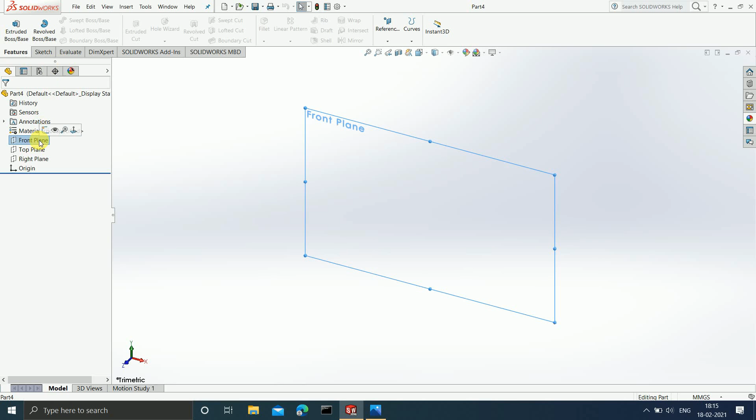First of all, click on File, click New, select Part, and then click OK. As we all know, whenever you want to make use of the Revolved Boss base feature, we first have to have a sketch, and if you want to draw a sketch, the first important thing is that you select a plane. So I'm going to select the front plane, then go to sketch and click on sketch.

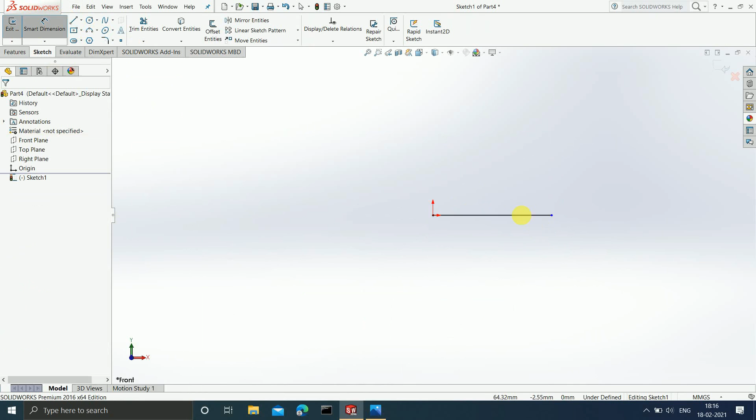Let's start with the sketch. Now we will start with the bottom part first. First of all, let us draw this horizontal line of 5 mm. This has to be 5 mm. Escape, smart dimensions, and give it as 5. Done. Now after this, let us draw this slanting line which is at an angle of 150 degrees.

Escape. Let's give the smart dimensions as 150 degrees. Giving the dimensions here is very important, and make sure that your figure is completely defined in this case.

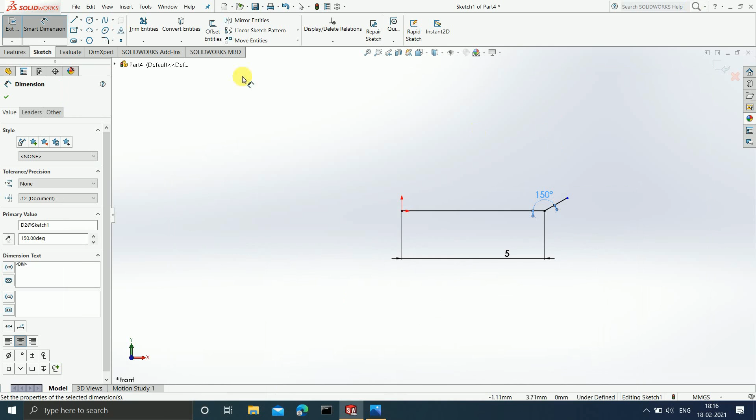Now after this, again there is a slanting line present here. Let me first draw that. Guys, you have to practice the sketches. Press escape. Make sure this point is exactly vertical to this, so I'm going to select these two points and add a vertical relation between them, then click OK.

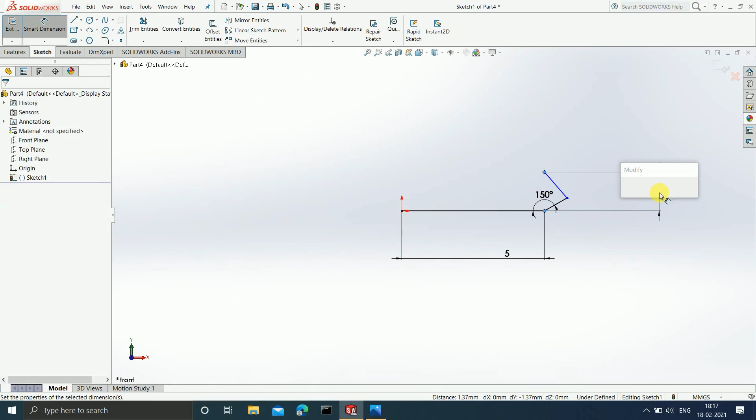Now after this, you can see that the distance from this point up till this point is 1.5. So let's give the measurement here as 1.5. Done.

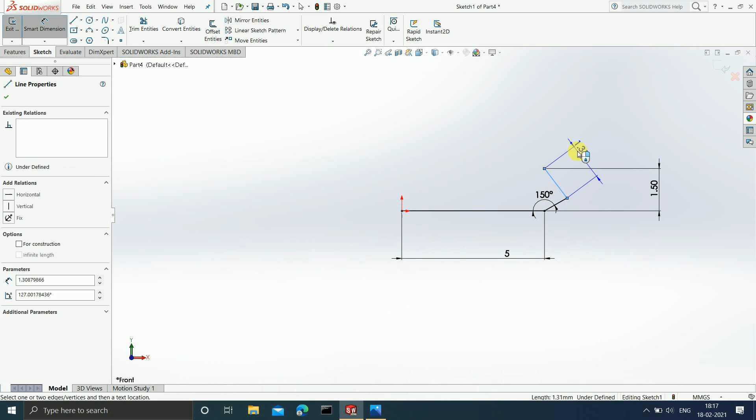Now the next thing you can see is that the measurement of this slanting line is 1.38, so let's give the smart dimensions to it as well. It has to be 1.38. Done. So this much part is done.

Now after this, there is a fillet. Before that, we will do the fillet which is present here, and the radius of the fillet is 0.2. Let's click on fillet, select this line, select this, first enter 0.2 here, then select this and select this. See, now can you see the fillet has appeared? Once this is done, click OK.

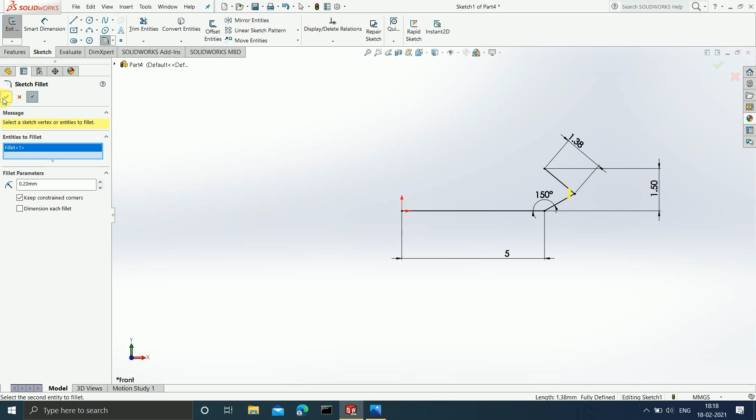Just move these dimensions aside so that there is no mess present here.

Now after this, we are going to make this curve which is present here. So for that, again we have to make two slanting lines intersecting at a point. Okay, so I will select this, I will add this. From this point I will make a slanting line. We are done with these slanting lines. Now it is time for us to give the dimensions to it.

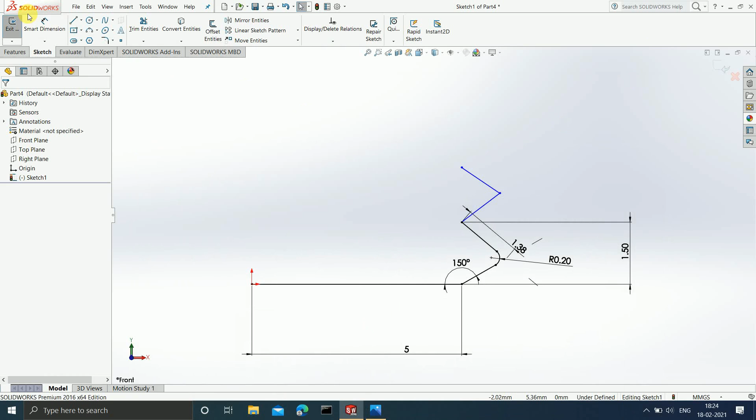Okay, so as you can see, the dimension from this particular point till here is 0.6, so let's set the dimension as 0.6. From this point till here, it has to be 0.6. Enter. Now after this, from this particular point till here it has to be 2. Can you see it is 2 here? So let's add a 2. Enter.

And see, the dimension from this end of the slant line till this vertical line is 3.5. So let's do the dimensions for that as well. Okay, see, earlier it is 5, let's make it 3.5. Enter. Done. Now after this is done, can you see that there is a curve present here? This curve is formed with the help of the fillet, and the radius of the fillet is 0.6 as mentioned here.

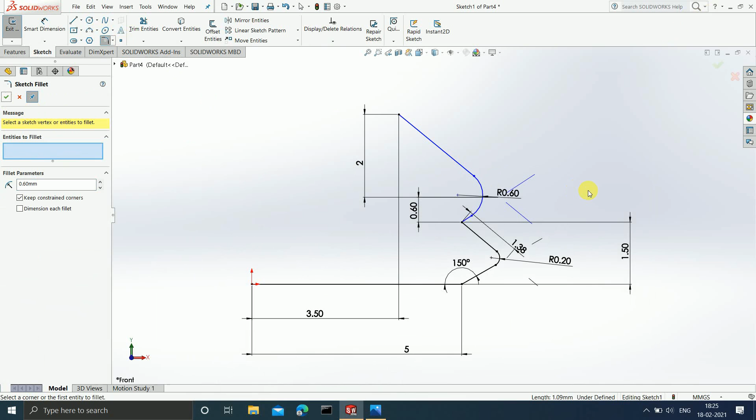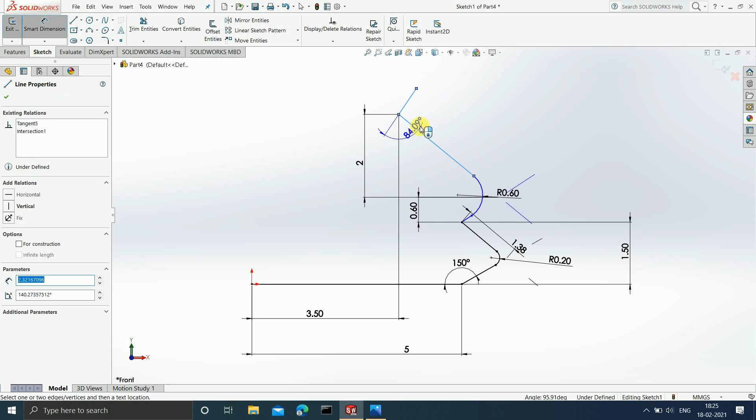So let's make use of the fillet. 0.6. Select this line, select this, and then click on OK. Done. Now there is one more slanting line which is drawn at an angle of 100 degrees. So let us draw that as well. Escape. Give the dimension as 100 degrees. Enter. Okay, now the dimension of the line from this particular point till here is 0.75. So from this till here it has to be 0.75. Enter. Done.

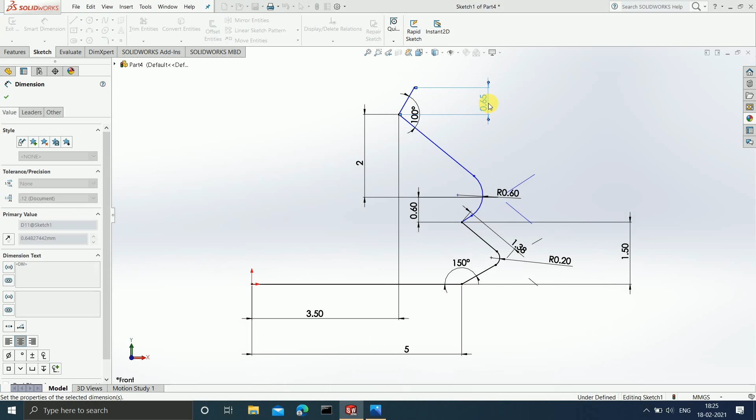Now we are almost ready with the lower part. Can you see that there is a curve passing to the upper part? Okay, and it is going to intersect at this particular line. So first of all we need to draw this center line. The center line is at a distance of 1.75. So let us draw a center line. Escape. Select this and make it infinite length. Done. Now give the dimensions. From the origin, it is at a distance of 1.75.

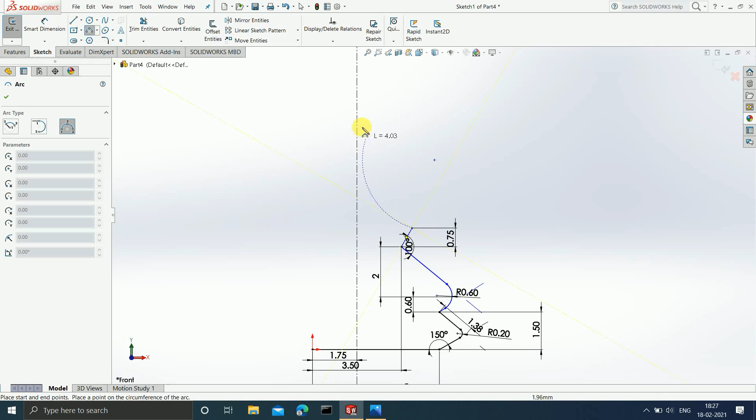Enter. Now I want to draw an arc here. So for that I am going to choose the 3-point arc command from this point, and it is going to intersect at this line, and just click here. Okay, escape. Now it is time for us to give the dimensions to this arc. Can you see the total length of this arc is 10? From the starting point to the ending point, the vertical length has to be 10. Click on escape. Select this point, and give the dimension as 10.

Enter. Now see, the radius is 20. So give the dimension of the radius as 20. Done. Now let us draw a horizontal line having a length of 1.75. Escape, give the smart dimension as 1.75. Enter. Now there is a vertical line of 0.5. Let us draw that as well. Escape, with the smart dimension as 0.5.

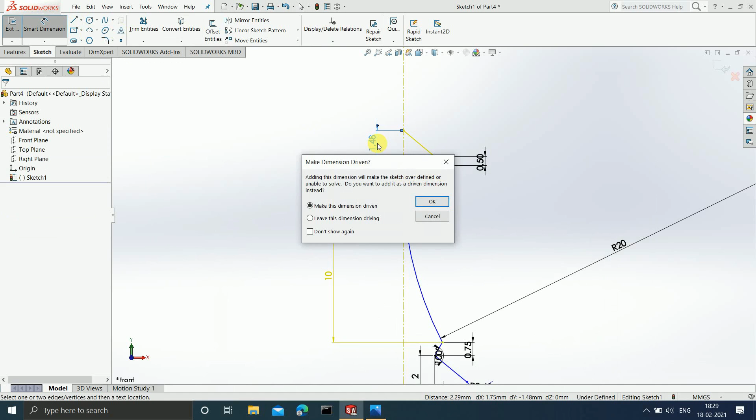Enter. Now there is again a slanting line. Escape. The dimension of this slanting line is 1. See, the vertical dimension is 1. So select this point, and give the dimension as, okay, there is some relation that has been added. So first we need to delete this. Click on this line. See, there is an equal relation added, parallel relation added. So first delete this relation. We don't want this relation. Now give the dimensions. Select this point,

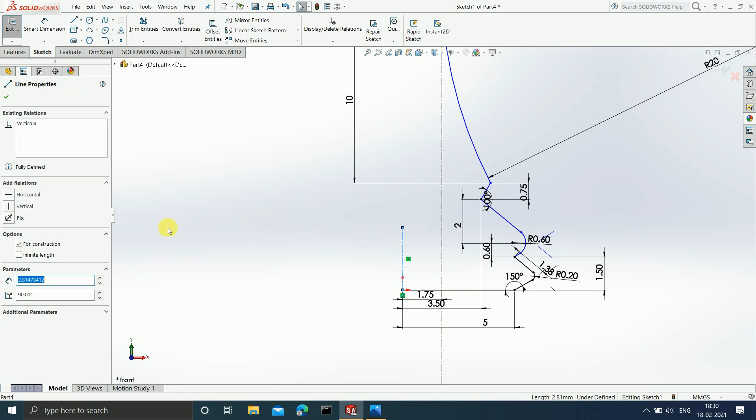Okay, make it infinite length. Select this line, make this infinite length. Then after this, let's draw the arc from this point till here, and it is going to somewhere here. Okay, escape. Now let us give the dimensions to this arc. See, it is 8. Vertical dimensions are 8. Smart dimensions, escape. Select the vertical dimensions as 8.

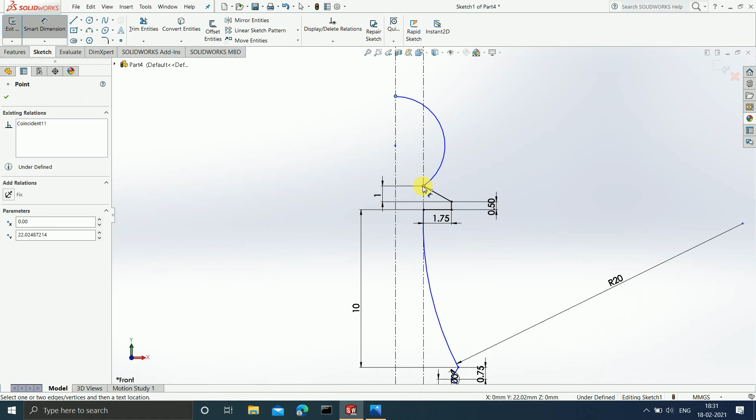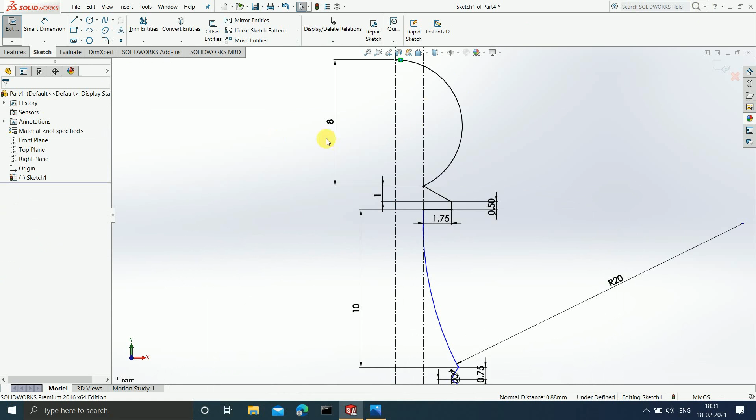Okay, done. And one more thing that you can observe is that the center of this arc is exactly intersecting with this line, so we need to consider that as well. Select this point, select this line, and add a relation coincident. Done. Now can you see guys that our sketch is not fully defined? There is some blue part here, so for that we need to give more dimensions here.

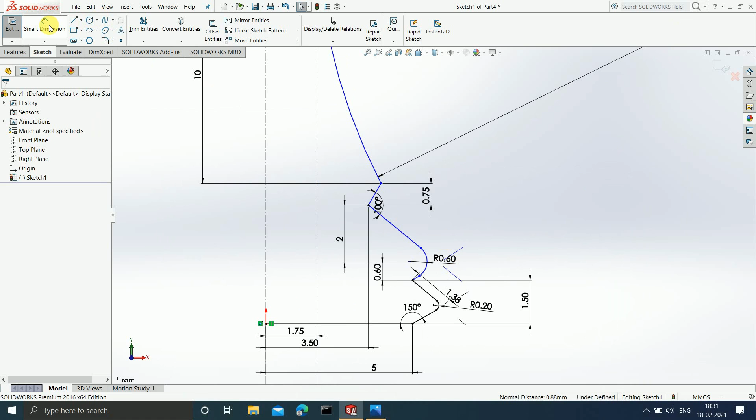So let us observe if there are any dimensions that have been left from our side. Okay, and if you just cannot observe, then give the dimensions accordingly until the sketch becomes black. See, I added 1.48 here, and now the sketch has completely become black. This indicates that our sketch is now fully defined.

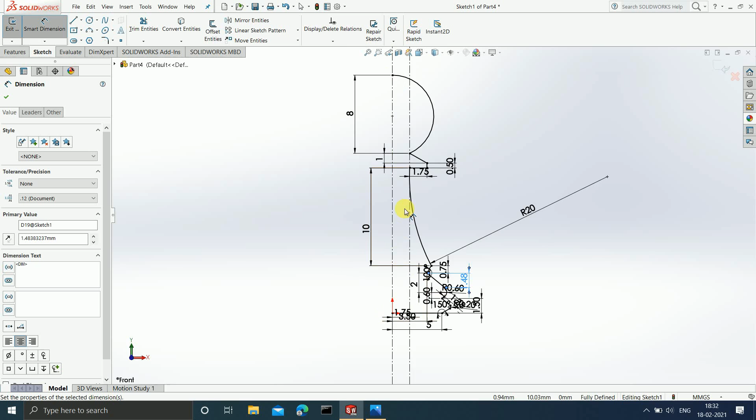Now once our sketch is done guys, the next step is that we join the end point of the sketch and the starting point of the sketch so that the sketch becomes completed. So now I'll select a line starting from this point and going up till the origin, as we started from the origin. Now click on escape. Done. Now guys, your sketch is ready. Now I will exit sketch. Done. See, this sketch is ready.

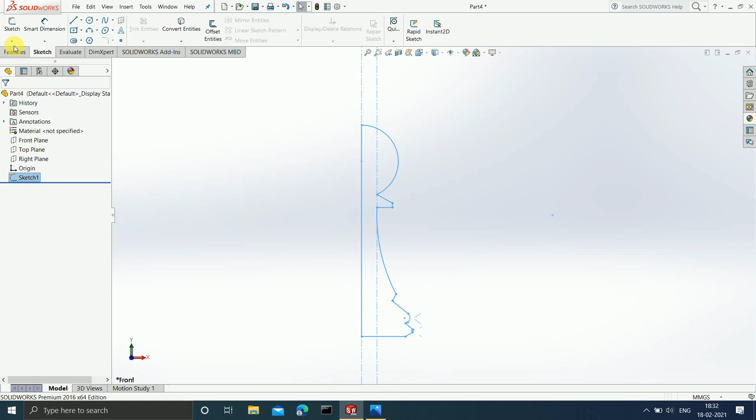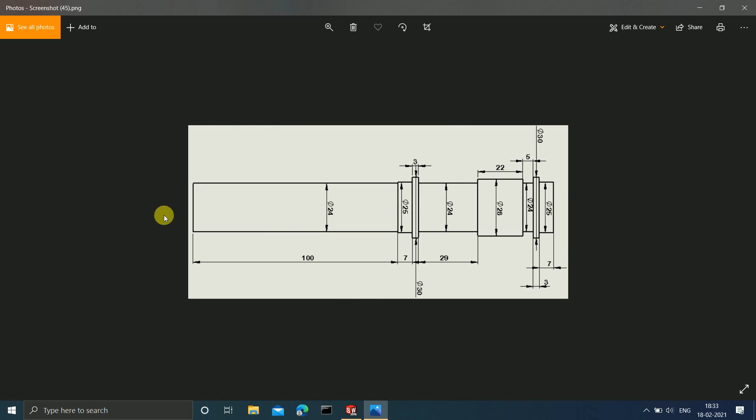Now select this sketch, go to features, select Revolved Boss/Base. Now they will ask us for the axis of revolution. I want my sketch to be revolved about this particular axis. See, now guys, can you see that your chess pawn is now ready? Now guys, if you observe, can you see that there is a different color? There is a wooden texture that is being added.

So how to add this? So for that, what we are going to do is we will go to material, we will edit material, then we will go to wood. See, there is a wood present here. Then we will click the tick and apply.

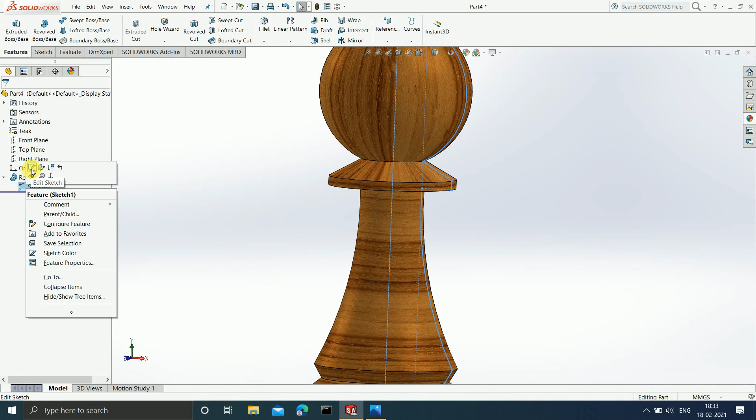Okay, now after this is done, can you see that there is an edge here, a sharp edge? So this doesn't look good. Instead we want a fillet. So let us see whether we have missed the fillet in the sketch. See, there is a fillet of 0.6 which we have missed. So now if I want to edit this, I will go in this revolve, I will click on this, see, edit sketch, and now I can easily add a fillet here.

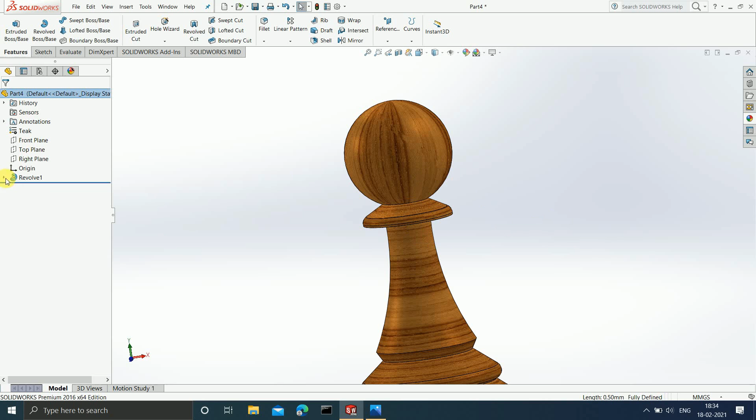So if I want to add a fillet, I will select this point, select this, and a 0.6 fillet needs to be added. So I will click on OK. Done. Now can you see the fillet that is added here? So this is how, even if you make a mistake, you can easily go to this revolve feature present in the feature manager, then go to sketch, and you can easily right click and edit the sketch if you want. Okay, so guys, now your chess pawn is ready.